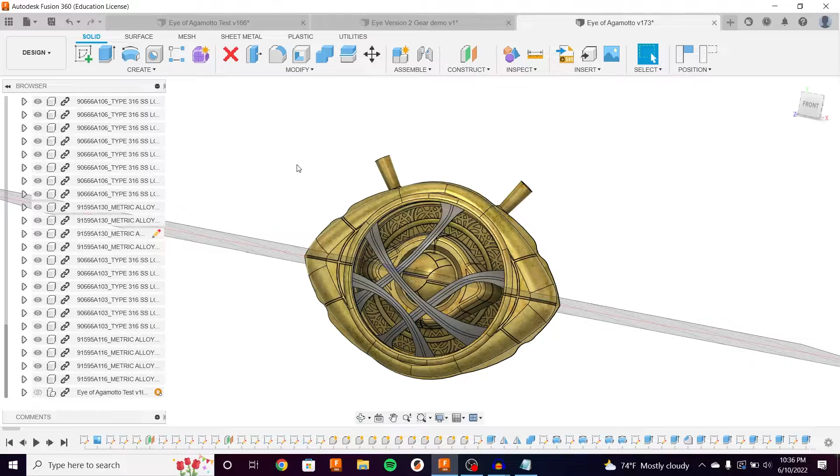All right, this is going to be the CAD walkthrough of the Eye of Agamotto, the latest version. About 3 years ago, I developed this version of the Eye of Agamotto, and I thought I would briefly explain how this one works, which will hopefully bring some context to the new one.

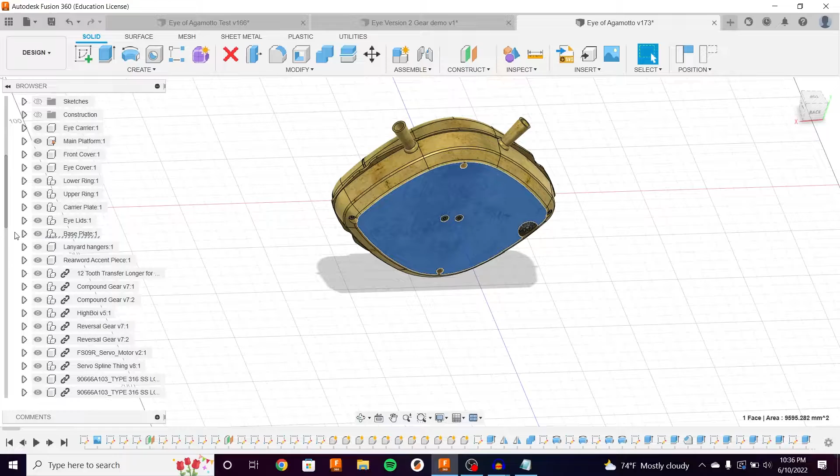This one is actually all bolted together, which I guess is demerit number one. That's something I wanted to improve on the new one. Let me hide some of these faces so we can talk about how it works. The front cover and back cover were both integral to how it works, so you could very carefully paint it and then realize you needed to tweak something, or accidentally break it, which is a terrible feeling. I knew I wanted to change that, and I did change that on the new one.

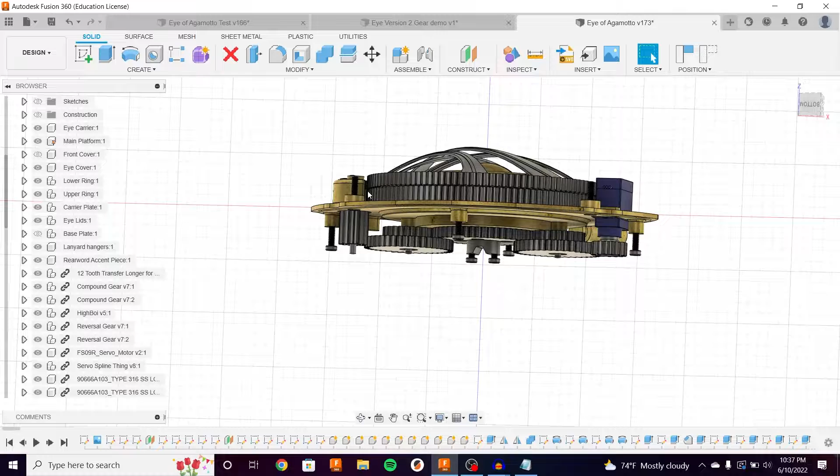For this one, it uses a servo motor. This gear spins, which spins this gear, and it goes across this whole plate through this gear and then through a bunch of other gears to get these rings spinning.

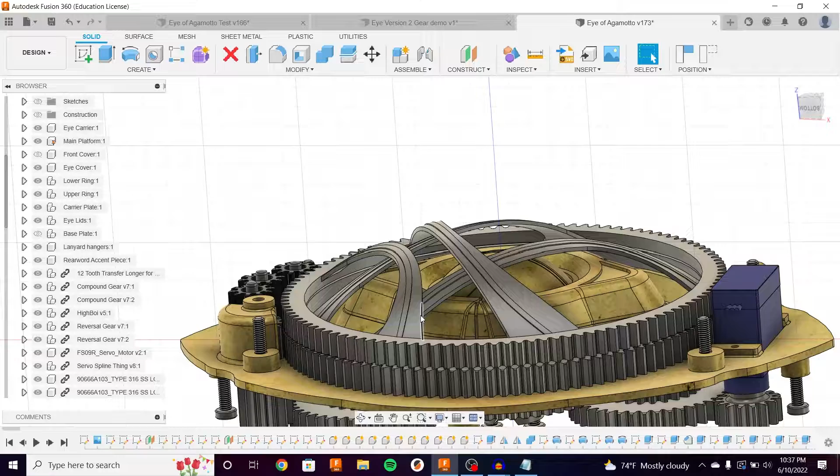This design has 4 of these arcs. I coupled 2 of the arcs together, so there's a set of 2 on top and a set of 2 below it. That was to simplify the mechanism, and my original intent was to have that be the thing that makes it work. In addition, this bezel rotates and these eyes open, even though only one of them moves at a time. The eyes open in this version as well.

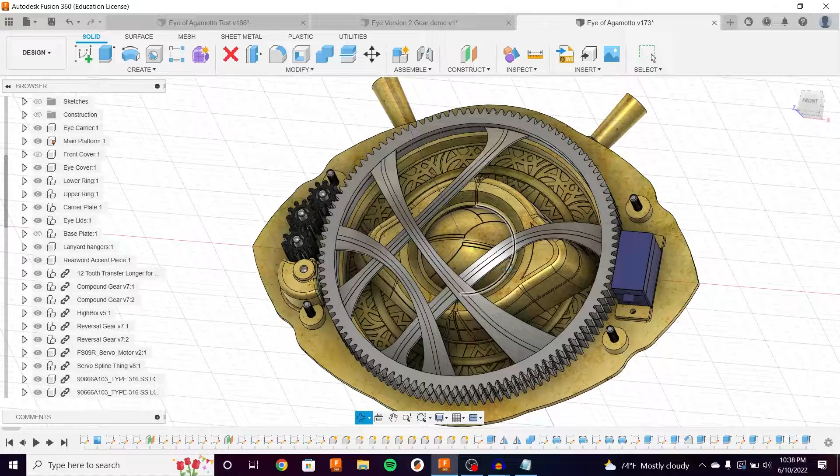I was happy at the time with how this one works. But, as I said in the main video, somebody else figured out how to make a 4-ring version, and I like a mechanical engineering challenge.

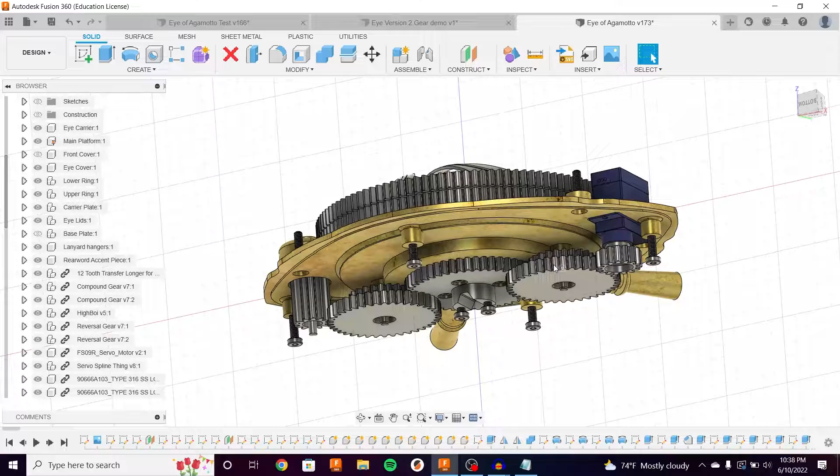So I looked at this one and tried to figure out what I could improve. The first thing to do, obviously, is to make the load path more efficient. Having your gears, your power come in over here and then have to go through a whole bunch of gears before it's actually spinning something, that is a pretty big mechanical load.

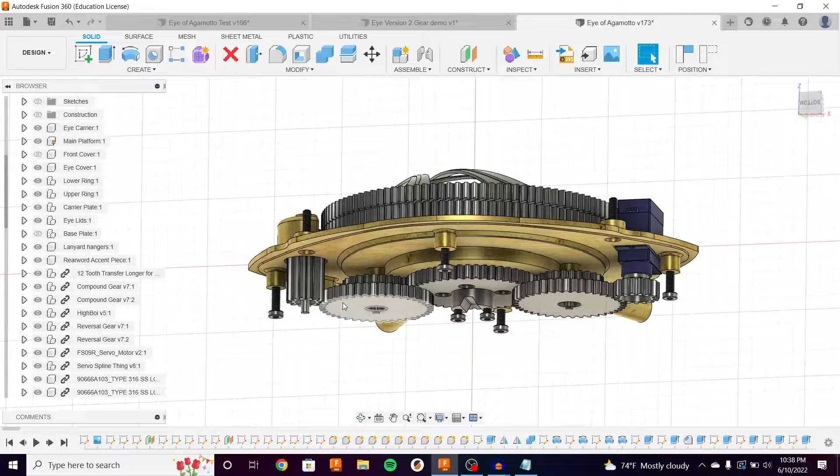This is a very large ring with a very large friction surface, so that is going to be the hardest thing to move. And it's at the entire other end of this huge gear ratio. I start with a very tiny gear, and I kind of walk my way through a bunch of different sizes - big gears, tiny gears, more tiny gears, all the way back to a big gear. And I am losing power that entire way.

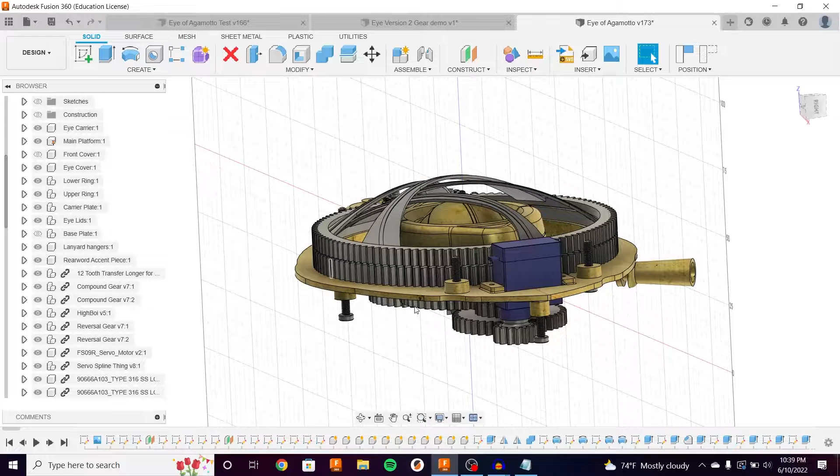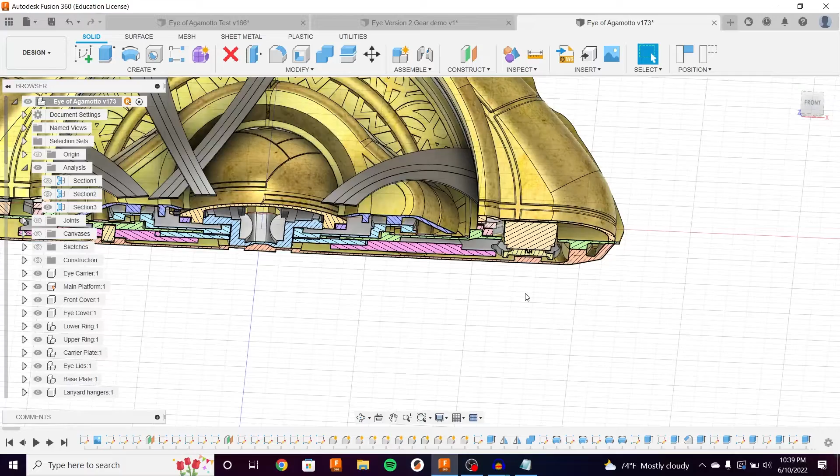So I knew I wanted to fix that, especially if I needed to drive 2 whole additional ring gears. The thing that defined this size was the servo - it's pretty large, and it's a pretty tight fit even with just this stuff. If I go into analysis and change cross sections here, with the servo, this is still a pretty tight fit.

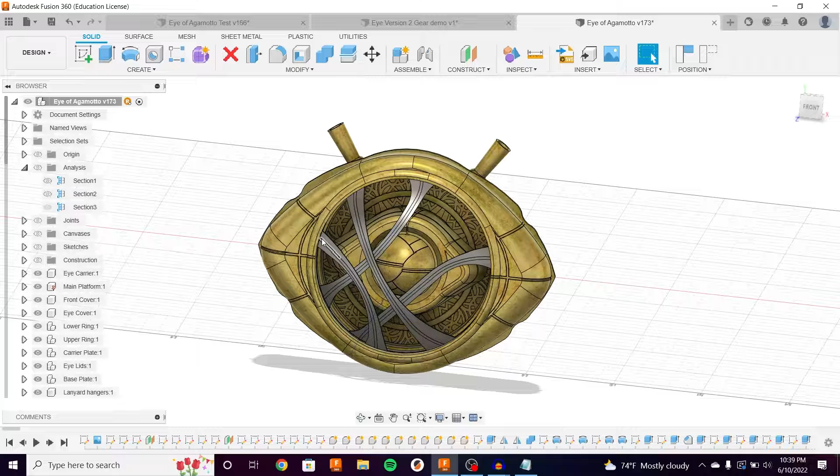That is what defined the size, which is roughly 2 times what it should be. It works - there are 2 rings that spin, the eyes open, the thing spins. I was pleased with it, but the new problem statement would be: obviously a 1-to-1 scale would be great, and 4 rings moving is a much more interesting movement. That is what led to the new version.

So this one has a few more details in it, but it is significantly smaller. It's actually 1-to-1 scale, and all 4 rings spin. This is the one that I made the main video on. So I'll walk through how this one works really quickly, and then we can dive a little bit more into it.

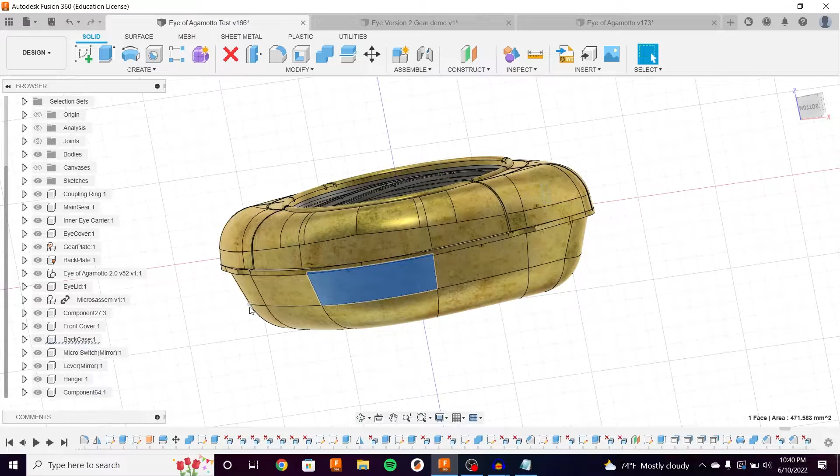First step: both of these, the front and the back cover, are just aesthetic housings, so they both snap into place and snap out of place. If anything mechanical goes wrong, you don't have to reprint and repaint and do all the finishing for the back and front cover, which is fantastic. Just from experience, that saves a lot of time.

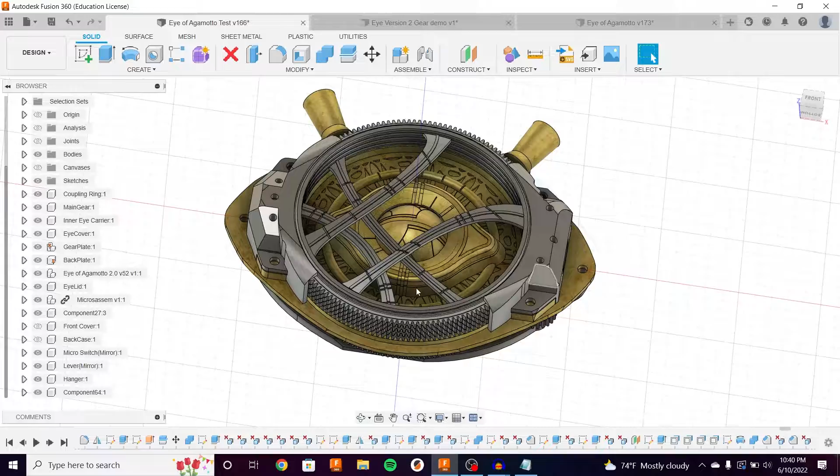For power input, on the other one I had the servo kind of off on the side. This one I tucked a N20, a Pololu motor - I believe it's called an N20 gearbox motor, but it's a very tiny, very high torque motor. I have it directly driving the main gear, and that's a pretty good power delivery method.

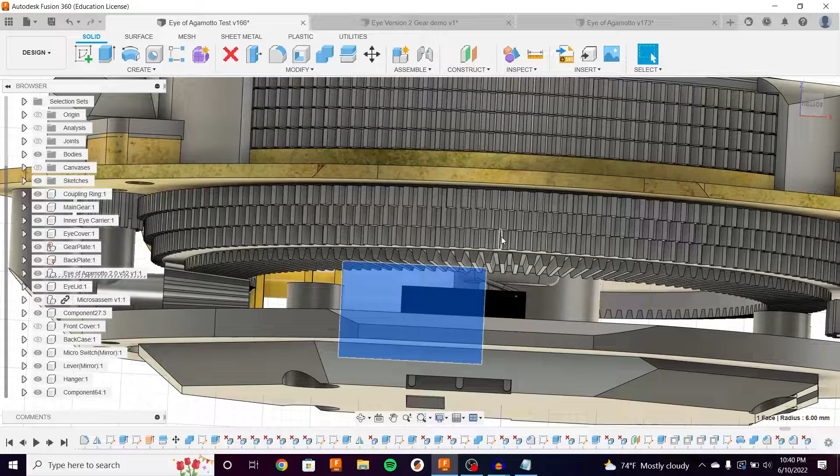So I've got the power input going kind of on the outside, towards the end of this moment arm. What I mean by that is it's far away from the central rotating axis, which, for engineering reasons, is a good approach.

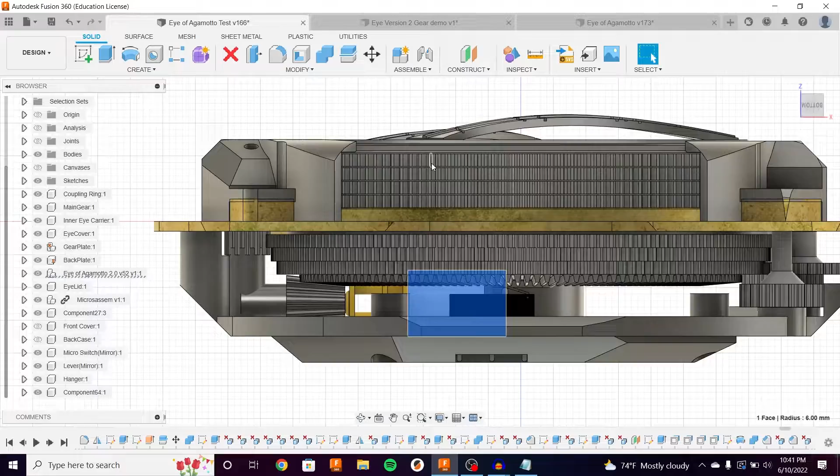I then have each of these rings directly pulling power, as quickly as I can get them to. I deliver power from this main gear to these rings. The 4 rings are up here, you can see some dividing lines between them. But that was the biggest mechanical engineering change that was made, besides the gear ratios to support it, was delivering

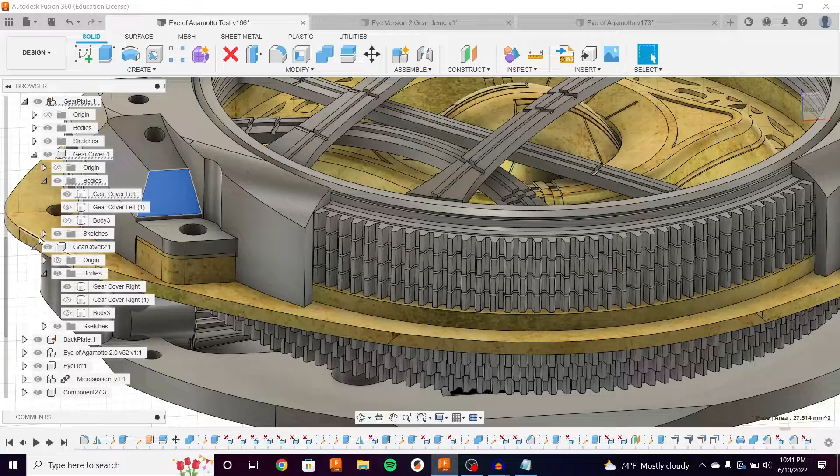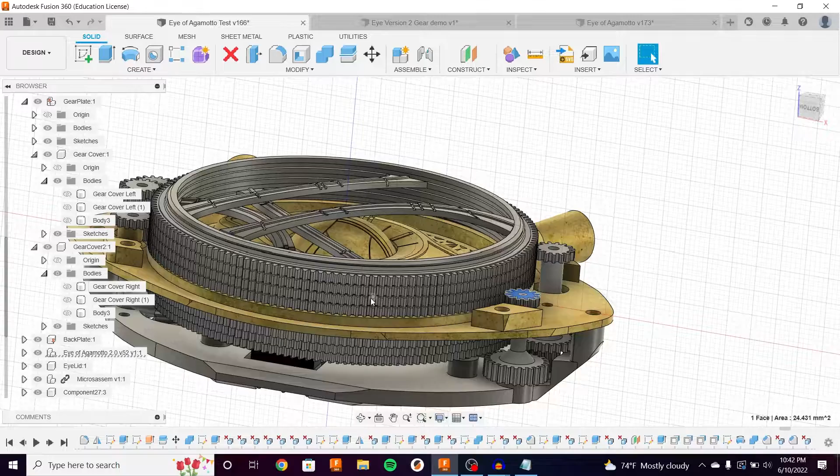power in a very clean and very short load path method. So there's 3 different steps here, and I'll hide these gear plate covers - you can see each of these gear steps. So I've got the main gear, and the left side is responsible for the first and the third, and the right side is responsible for the second and the fourth, depending on how you're measuring it. So power comes up through maybe 1, maybe 2 gears, and then is immediately at the rings, which is a much shorter load path and uses the power much more efficiently.

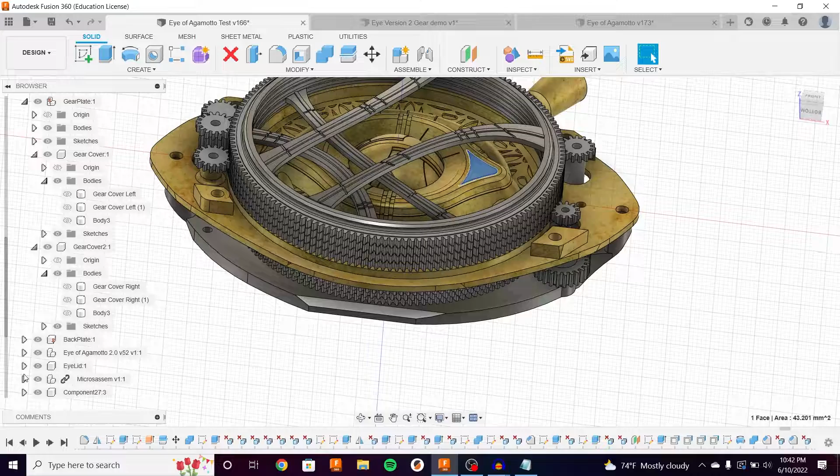To get the bezel to spin, it works pretty much the same way as the other one, it's just more of a snap fit. So if I hide this... there's just a little snap detent in there, and this guy spins with the main gear. Which again, is just a more efficient way than having a handful of gears to get through before you're actually moving anything.

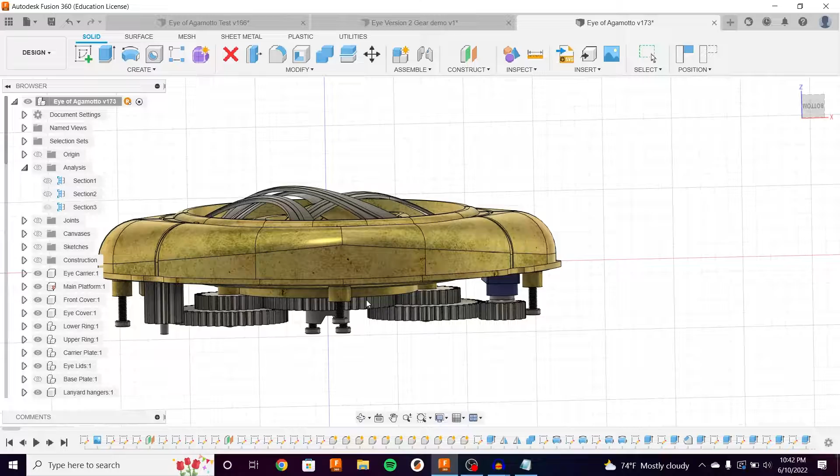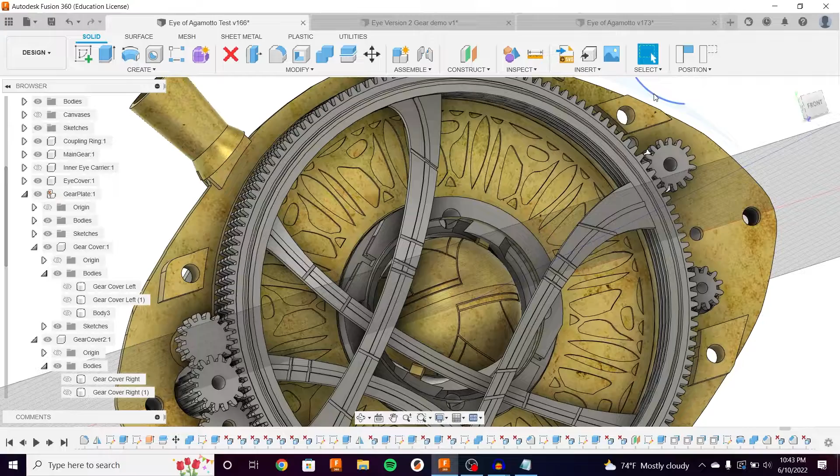And the way that the eye works is as this spins, these little lugs run along this ramp, and then that ramp actually dives into the housing. And when it dives into the housing, this lug follows it. And that happens on both sides, and the whole thing - each eyelid opens up with that motion. And that's kind of the overview of the function.

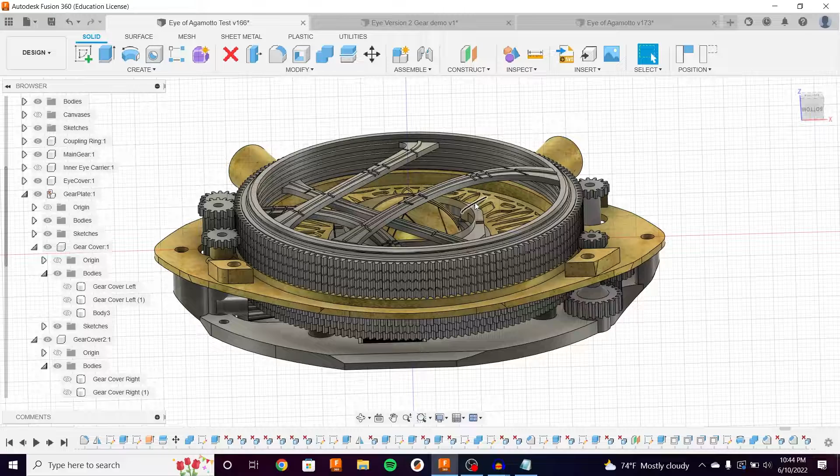To actually get the gear ratios, it's a little hard to explain in a compelling video format, but the way I approached it was I knew that this bezel is going to spin 180 degrees. I could just pick that up from watching the GIF from the movie footage. So if this is going to spin 180 degrees, I know that I can use that as the master ratio to calculate all of the other gear ratios from.

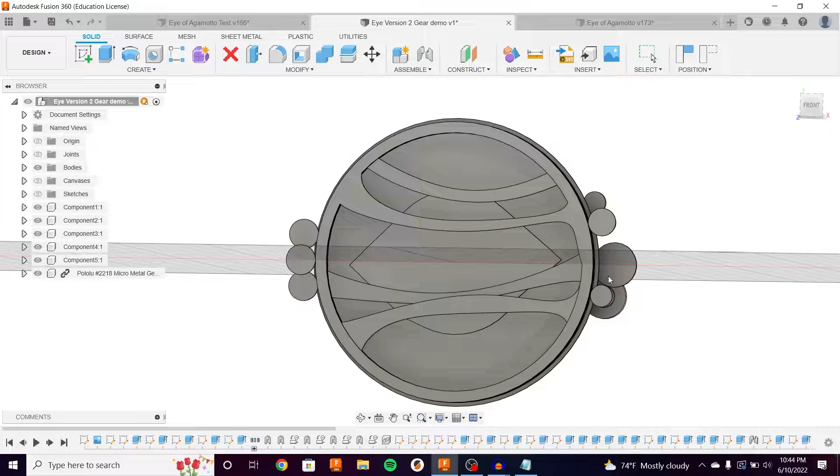From there - this is way earlier in the project, obviously, this is the first model, proof of concept model that I did. But I knew that this bottom gear was going to spin 180 degrees. From that, and looking at the GIF, you can eyeball what number of degrees these other rings are going to spin through the full cycle. And then between 180 degrees and the eyeballed angle, you've got a ratio. That ratio is your gear ratio.

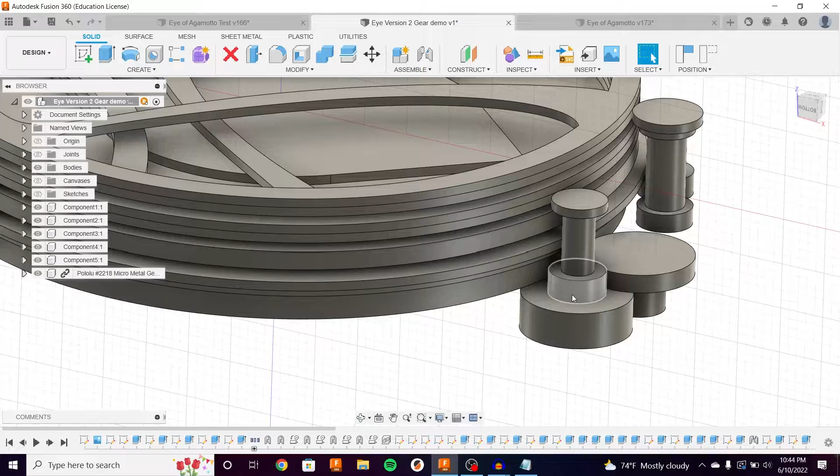And then it's just a matter of sitting down and seeing what combination of whole numbers - because it's a gear, you can't have a half gear - what combination of whole numbers, combined, will allow you to get to that same fractional ratio. So I don't really know how to do that in video format, but essentially it's a bit of eyeballing the angles and then plugging and playing with fractions until it does what you want.

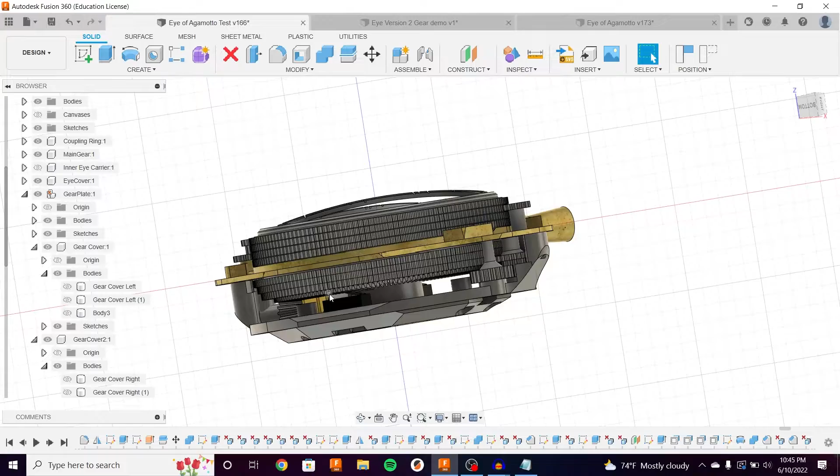So you can see here I've got my 4 rings and then 3 stepped gears with a few gears here, and this is exactly what I ended up doing the actual engineering on. So you have your 3 step gears here, you've got the same exact gears, just with actual gear teeth, and then the 4 rings. And that is more or less it for the mechanical design.

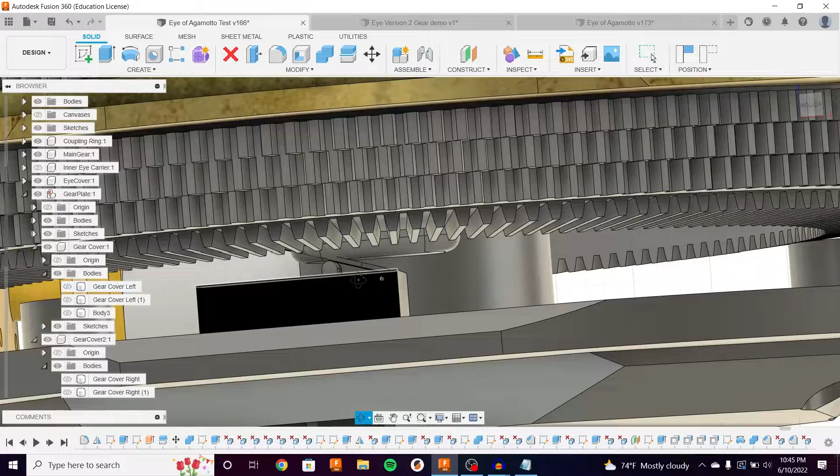I think the only other feature that is really unique here are these micro switches. So there's this whole electrical plate. If you remove the electrical plate, it's just a hand-operated assembly, and I did that intentionally because I think the electronics are either going to be too much work for some people, or used in a display environment.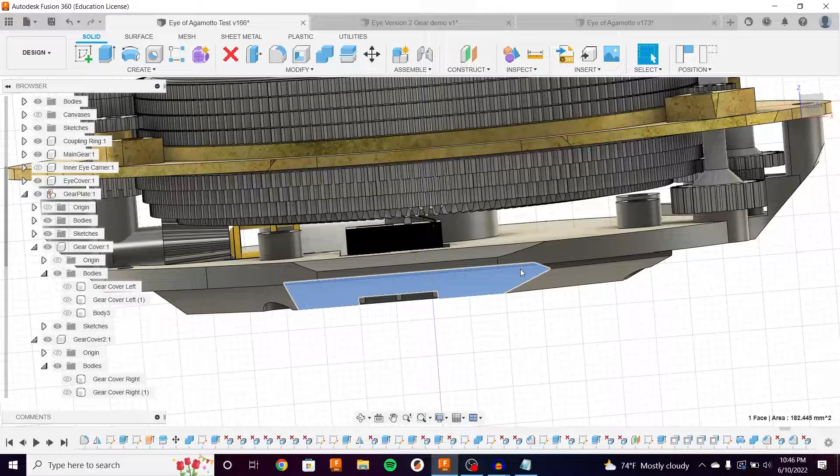I personally, if I'm showing this off, I like to be able to hand it to someone and have them just play with it as a toy, and not have it be like, oh, be careful of that wire, or any of the stuff that goes along with electronics.

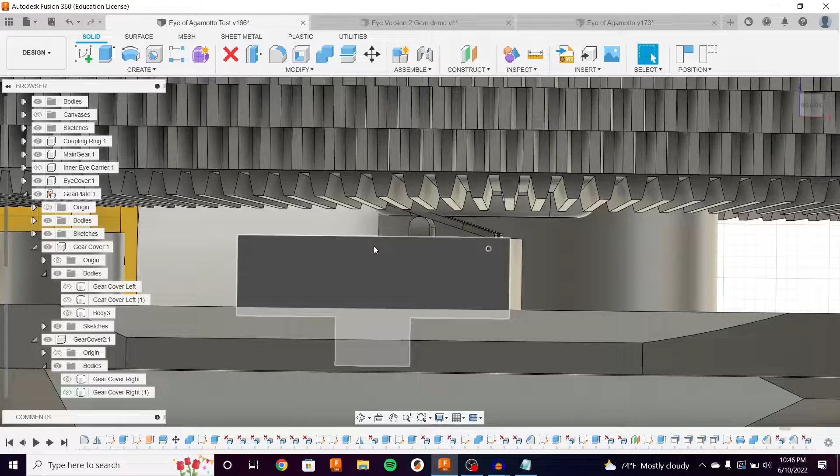So to get the electronics to work in more of a cosplay setting, or really showing it off setting, I wanted no microcontrollers, nothing directly controlling the timing, because that can be problematic. Timing can be affected by the battery voltage depending on how you do it. If you're timing how long the motor is spinning, and the motor slows down, your timing is off. I wanted to just do it with batteries and switches because it's such a simple motion.

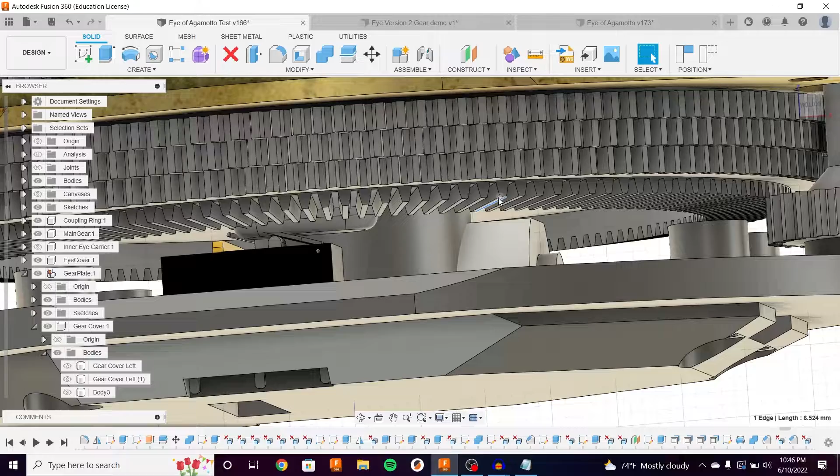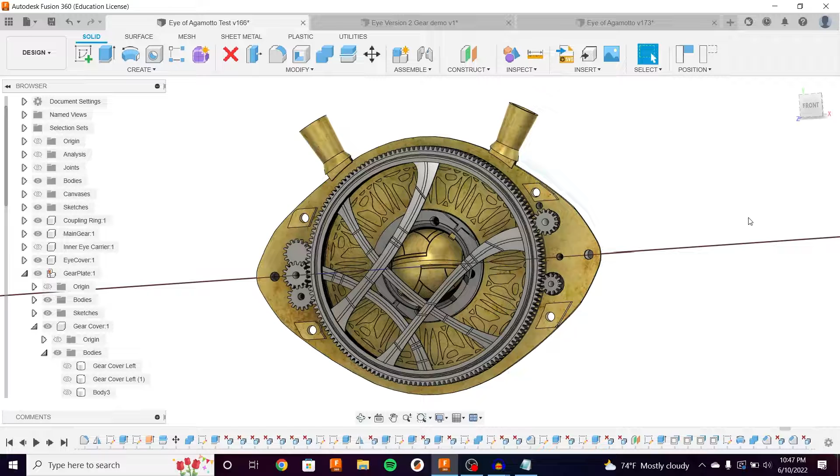So what I ended up doing is making a very simple circuit. When this spins into one position, a lug hits a micro switch and turns power off to the motor in that direction. Then when it spins 180 degrees, there's another micro switch on the other side that it crashes into, which turns the motor off in that direction. That allows you to get the full range of motion with no concerns for microcontrollers or voltages. You pop a 9-volt battery in, and it runs at one speed. A 6-volt battery runs at a different speed, but it doesn't change the overall performance. I wanted to make it robust like that.

There's a bunch of holes and stuff for shaft supports. These are all pretty important just to keep it stable. These are very tiny gears, and they have a tendency to skip teeth if you apply too much force.

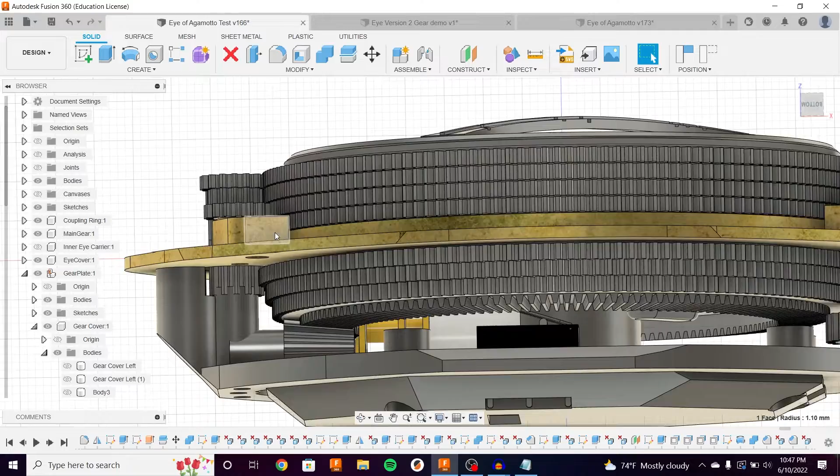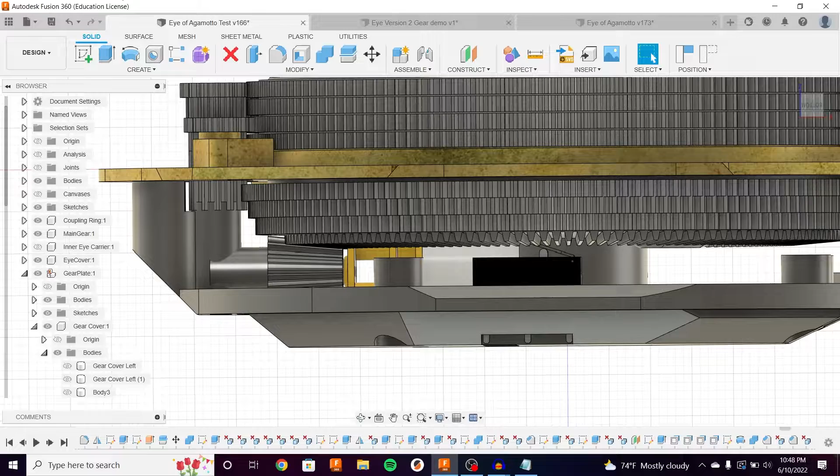One of the changes between the video and now is I've actually added an extra washer in here, which I need to thin out. I sanded mine a bit, but I have a printed model that works. I added a washer just to better support this piece, because one of the early failure modes of my prototypes was when you deliver a lot of power to this motor, there's not much stopping it from pushing this whole gear assembly up and deflecting away. I've resolved that by sticking a washer in there because it can't crush the washer.

But that's pretty much all the mechanical function. I'll throw these covers back on.

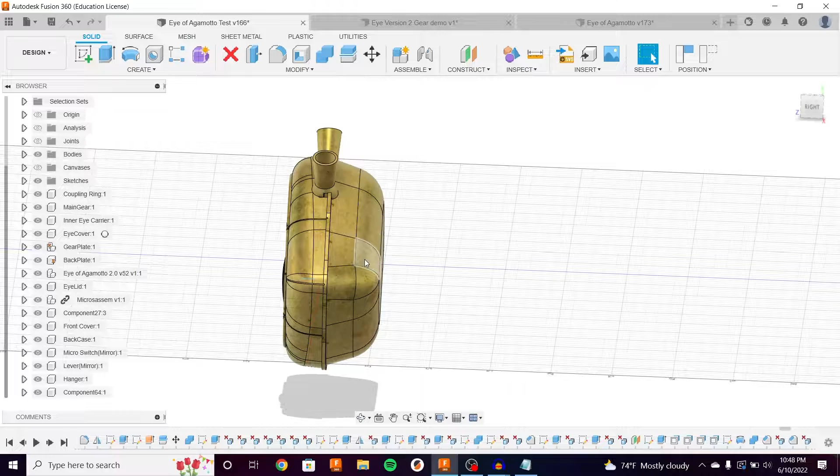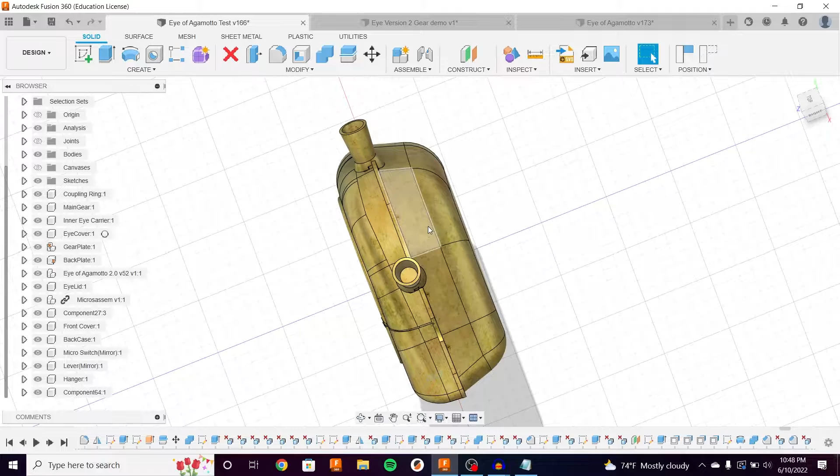I was generally able to do all the things I had hoped it would do. It's a little bit thicker than I'd like, and the majority of that, if I go into cross-section, is actually this motor. So if there's enough interest in a completely electronics-free version, I could probably squeeze out another 6 to 7 millimeters, which would go a long way to making this look even thinner.

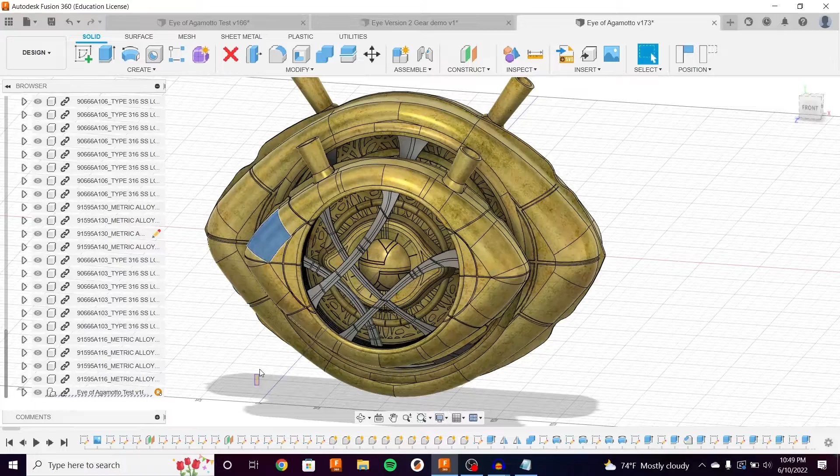But I think the really impressive part, comparing it to the old one with these covers back on, is that I was able to do all that extra motion in about half the size. This is the size comparison of the old version and the new version, and I'm really pleased with how the new version came together.

They're roughly the same ratio. It looks like I just scaled one down, but the newer one does a whole lot more from a functional standpoint, and I think it's a lot more reliable of a mechanism.

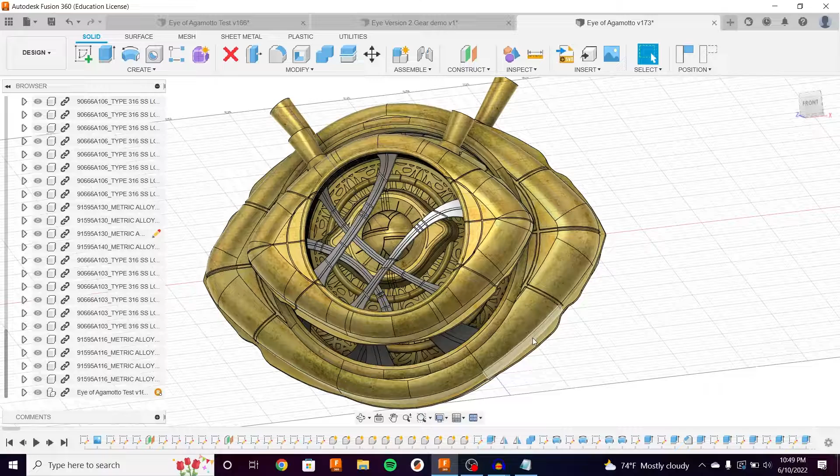From a CAD model standpoint, it's not great. The feature tree is huge, and this isn't even the whole thing. At one point, when I was originally locking in my gear ratios, the computer became almost unusable.

I was using a parametric gear ratio generator, but that meant every time I reloaded or changed the model, it tried to recalculate the whole thing. To solve that, I exported my model as a step file, effectively doing an engineering design lock on the gear ratios, and imported the step model as dumb geometry, continuing to model from there. Not the best practice, but it was functional, and I knew there was no turning back. I didn't plan on changing anything, so if I had to change any of the gear ratios, I'd essentially have to start over. That's typically why you avoid doing that kind of thing, but I thought it was necessary here.

So that's all I'm going to say about the CAD model. It was not great, do not recommend. But that is the full model and the functionality, and some of the thought that went behind it.